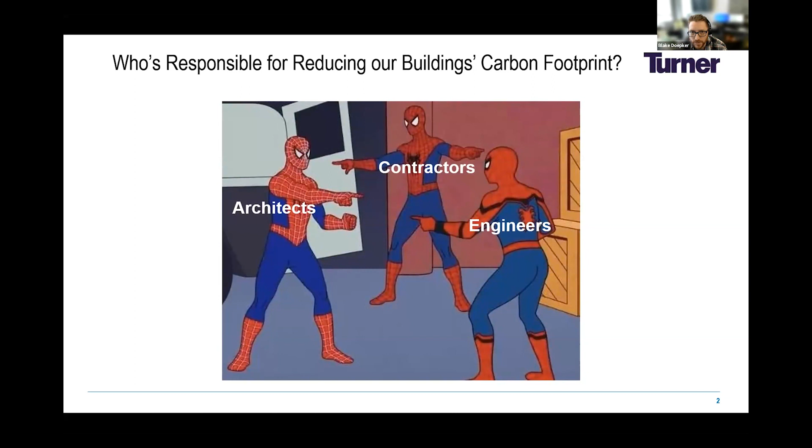The goal, when I was back in my MKA days, was to try to reduce and improve our specifications and our business as usual, and apply those lessons learned from a GC perspective. So what are we building?

I'm going to tear the Band-Aid off right now. The client likes to keep things close to their chest. I sat down with my project executive when I was proposing this conversation, and he said I'm not going to mention the project name, the client, the building type, or building location. So we're going to keep it simple.

This study involves a lot of feedback from different parties, namely our structural engineer, our architect, and most of all our sustainability consultant. I wanted to give a plug to those guys for all their hard work, at which point my PX issued the timeout symbol and said we can't even share that. So regrettably, for those I worked with, love you, but we're going to keep this super vanilla.

So vanilla it is, but we'll try and add a couple flourishes as we go.

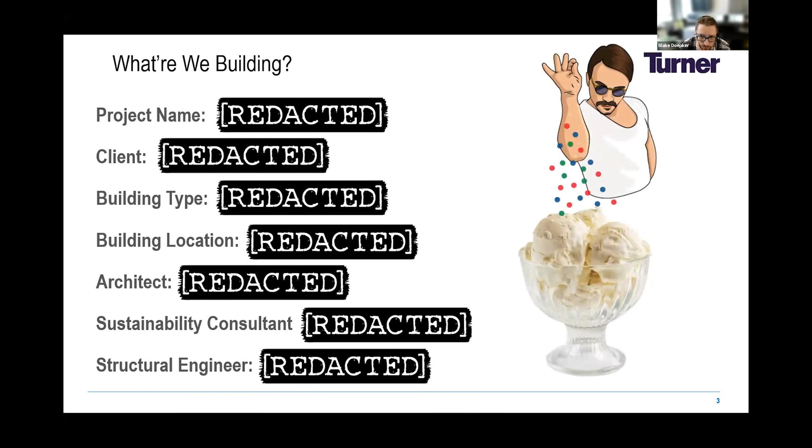Beyond the project goals coming from on high, the owner set a requirement for 10% embodied carbon reduction, with the project goal itself being to exceed that and reach a 20% reduction.

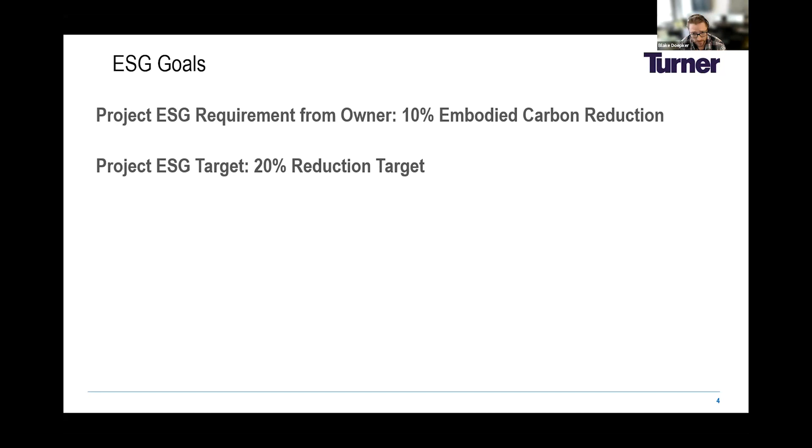For those of us in this space, we've probably talked about it at length among the design community and found passion there, but it was always running up against the will of the owners. So even if these aren't super ambitious targets, it's really exciting to see this ingrained in business as usual, and to see that becoming more pervasive in the industry.

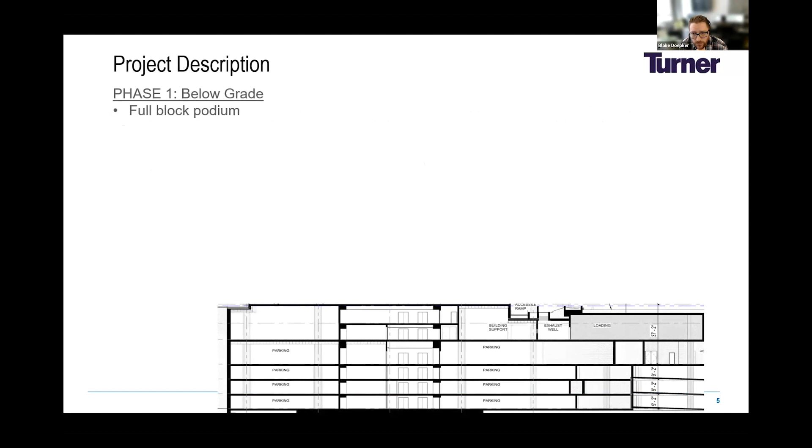The project is a full city block podium at high level and below grade. The Phase 1 tower massing was dictated by trying to maximize building height while not triggering a performance-based design approach, which would impact schedule and isn't right for this project to go too tall. To maximize floor count, we're ultimately going with the system that allows us the tightest floor-to-floor, which is a concrete system.

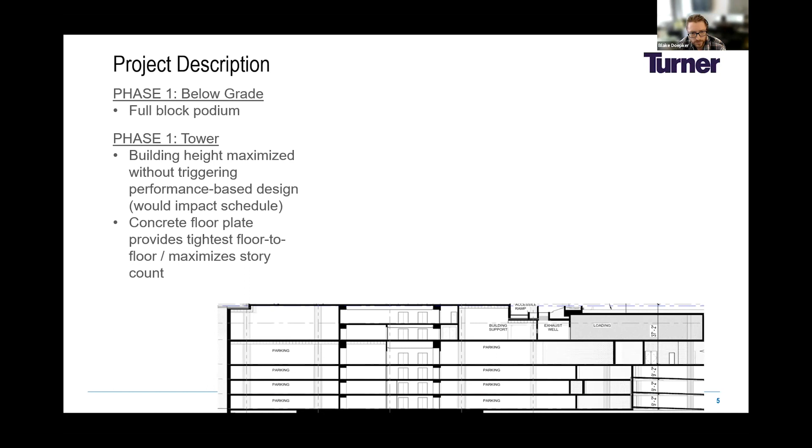Using a sample rendering, we're looking at a building tower of about 240 feet. In terms of building height and type, this made sense for our project to stay within that realm, the floor count and all that, and the system really was pretty much set.

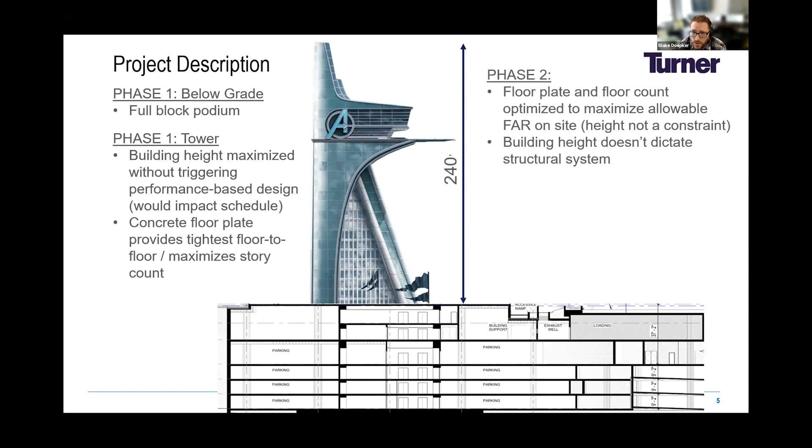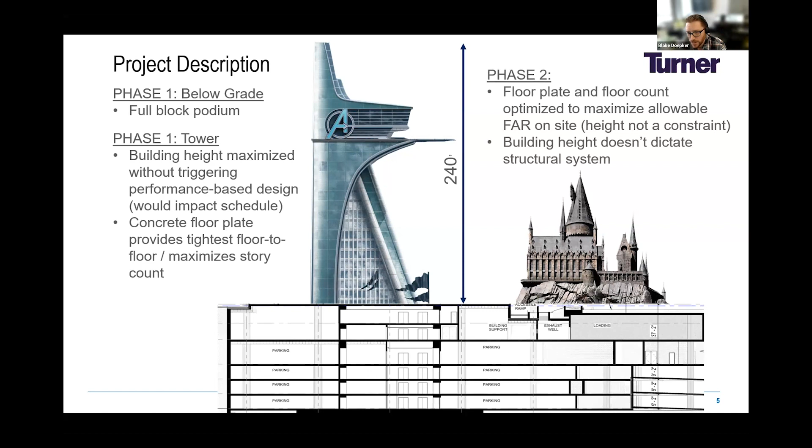Phase 2 is a different story. That building's floor plate and floor count is optimized to maximize the allowable FAR on site. In other words, height is not a constraint, so building height doesn't really dictate the structural system. Using some sample mid-rise building, we could play with the floor-to-floor, different systems, what have you, and it wouldn't really impact the functionality of the project.

Where we started as our baseline, the project was essentially a concrete PT slab, 10.5-inch PT, longer spans, more aggressive vibration criteria. That's really what's governing the design. Based on the programming, it was ideally suited for a side core type system, which for the structural engineers in the audience, means you're going to have to add some brace frames on the perimeter to manage that torsion.

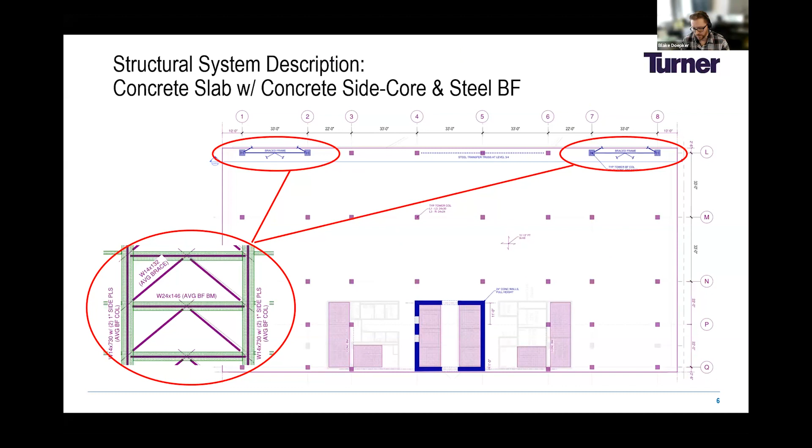Because we weren't constrained the same way on the south tower, the owner reached out and said, hey, what are we thinking about potentially—I know we were going down a path with concrete, but what about steel? So we worked with our design team to craft a couple different studies. For instance, here would be a concrete core with a steel floor framing, slab and metal deck system, and it still has those little wing walls, or brace frames, on the perimeter. And then finally we go for the all-steel option where we pull out that concrete core and instead add additional brace frames there at the center.

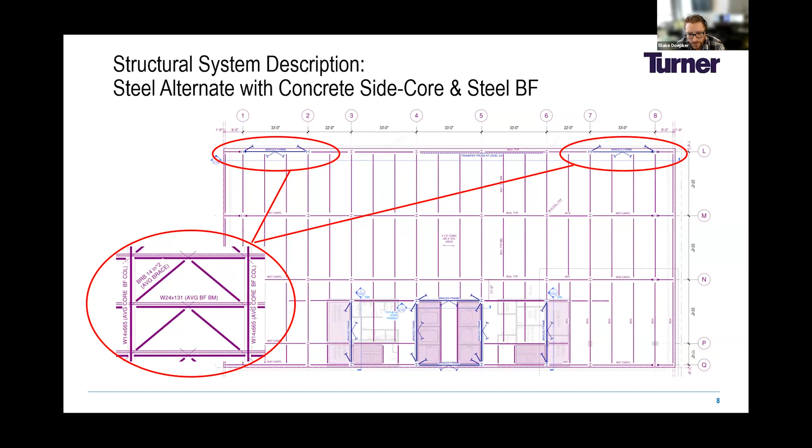One thing of note for these different systems—I already alluded to it earlier—we're looking at different floor to floors. A 14-foot floor to floor for our concrete option, but that's going to have to get pushed to roughly 15'-9" for a potential steel option. So from a facade area standpoint, those things need to be accounted for.

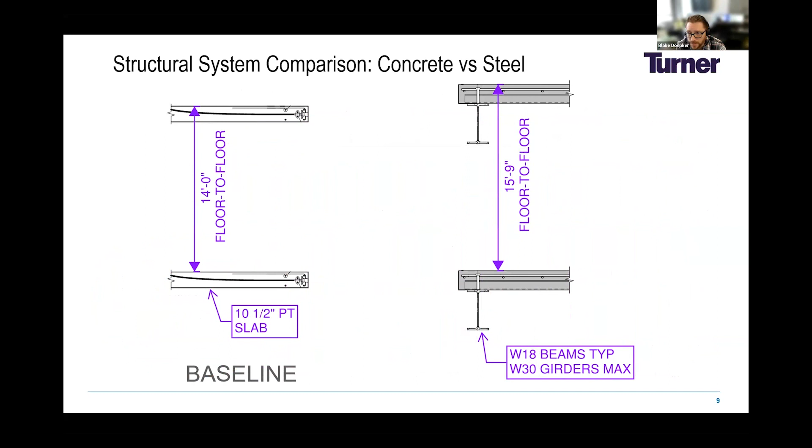Typically as general contractors, we're collectively very good at putting dollars to comparative studies. And I say collectively because I personally am not that great at it, but the estimators I work with are very skilled in this arena.

For certain clients, for certain projects, the question might be, okay, what's the cheapest, what's the easiest, what's the fastest? But to our clients' credit, they really wanted to look at this holistically and think about the big picture, beyond just dollars and cents.

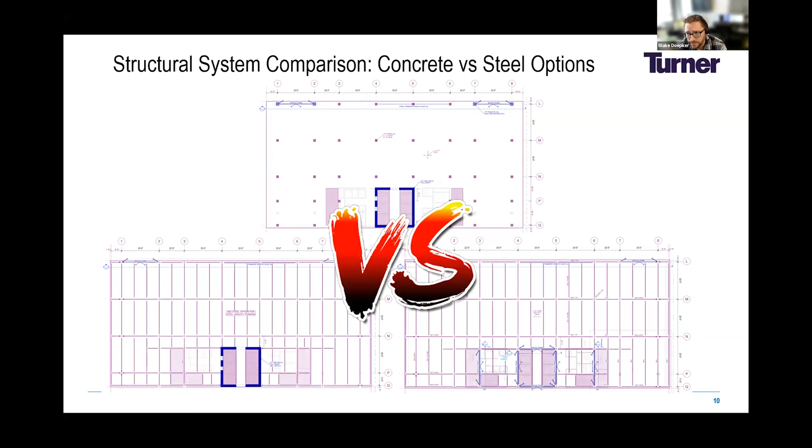Our structural engineer on the project actually proposed utilizing a decision matrix of some sort, and this provided us a good framework to work through. Giving a snapshot here, the spoiler alert was that our concrete option came out cheaper, with the all-steel option coming out with the largest premium. The premium was considerable, but not so much that we absolutely had to go with the cheapest option. We essentially assessed a whole host of different criteria.

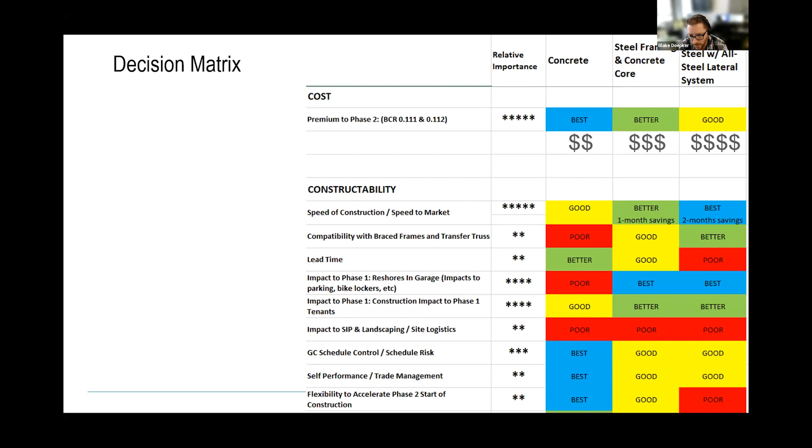So speed of construction, compatibility with our brace frames and things like that—concrete and steel don't always play nice together. And then just the impacts, if for phase 2, to what the phase 1 tenant might experience. So you can kind of see it's very subjective, coming up with the relative importance and trying to find some way to create a story. We solicited feedback from our architects, MEP trade partners, etc.

So just comparing and contrasting: a concrete building, not surprisingly, is going to be your heaviest building. It's the largest core wall, largest columns, foundations are the heaviest. However, it does have the smallest floor to floor, and the least facade area goes along with that. Steel framing with the BRB core then would be the lightest—the least amount of concrete, and the smallest foundations as well. Certainly, it does have a tall floor to floor.

The other option there, with a concrete core but steel framing, was kind of right there in the middle. So we took this opportunity to add one more line to that decision matrix, namely looking at the embodied carbon. In this case, what we did is utilize anticipated mixes. We worked with our self-perform team to say, hey, what's our typical PT mix that we've got—looking at, we're still in early phase design, so we don't know who we're going with, but looking at the past handful of jobs, what's the standard Stoneway, Cadman, and Cal Portland mix, and that's trying to inform ourselves there from our life cycle assessment.

So that was essentially not quite a guarantee of which mix we're using. Mind you, these aren't like a high-performing mix—they're just your standard run of the mill.

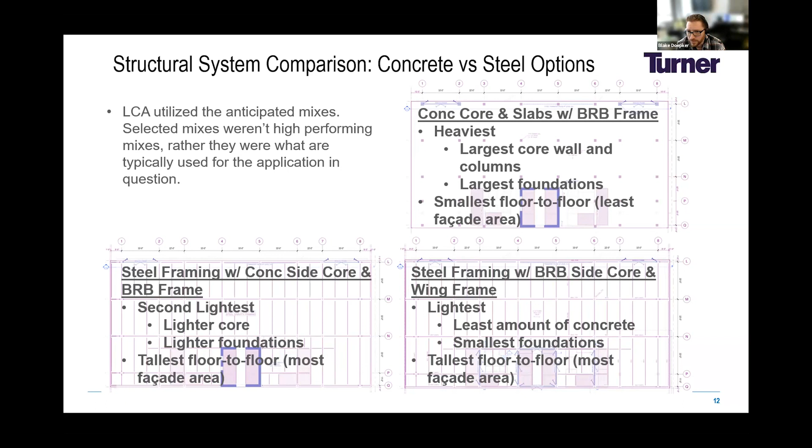And then for steel, we ultimately went with industry average values, just by virtue of the fact that there's a lot more question about where you'd source it, but there's certainly opportunity for scrutiny there.

So when it all came down to it, our life cycle assessment actually yielded some interesting results. We actually found the concrete building performed better than the steel option. Note that there's some interesting questions about that.

I did mention before that vibration criteria is a large driver in the design of our floor system. What we determined while looking at this is really for a 10.5-inch PT slab, that's appropriate for the slab spans for this particular project. And when it comes to vibration criteria, you're really getting that improvement for free. It's essentially coming along for the ride.

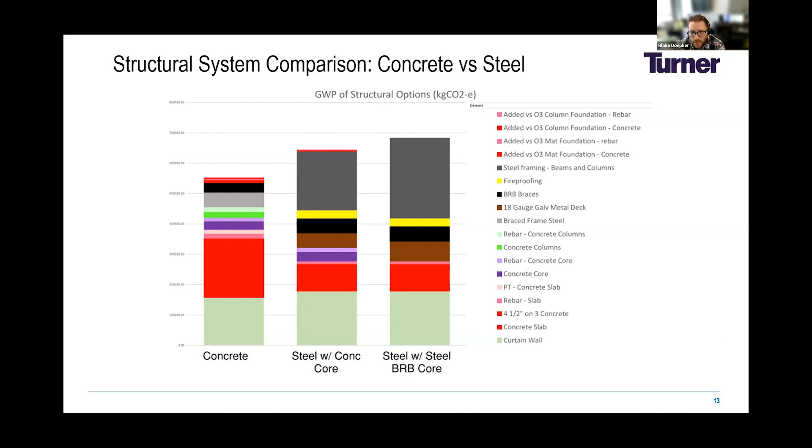Meanwhile, for the steel options, those are probably heavier than typical floor framings. So what we end up seeing is maybe a larger than typical impact due to the steel framing for our particular project.

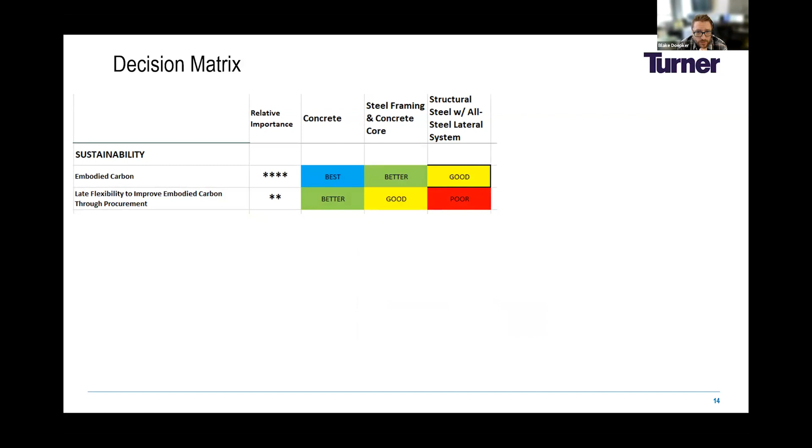So adding a couple of different lines to the decision matrix, noting the embodied carbon, I think I'll just note that this relative importance is really, again, a subjective topic. I think if you could poll the people in this audience, we might weigh those a little bit differently. But that said, it provided us a pretty important data point.

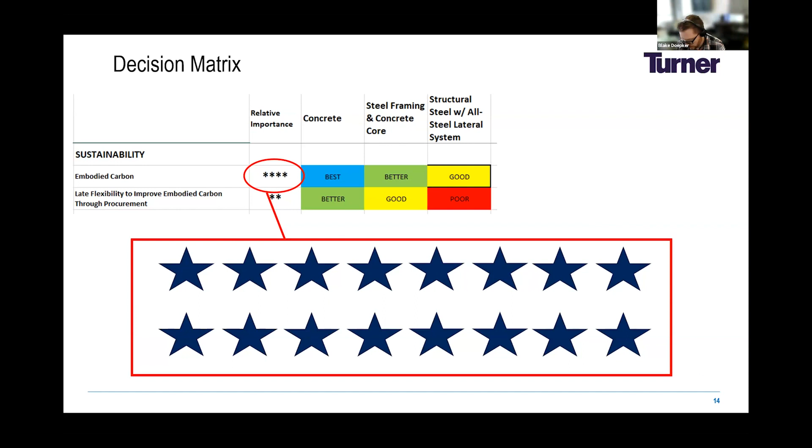And we laid this out, our design team, GC team, and ownership. We said, listen, concrete here ultimately is the cheapest. Yes, there's a schedule sacrifice. There's some pros and cons along the way, but the third thing out of our team's mouth was, this is also a winning story as far as embodied carbon goes. So it made the decision ultimately all the more simple. It was just an interesting exercise to work through.

Beyond that, this project right now, again, we are very early phase. What other low embodied carbon strategies are we considering? We're looking at, obviously, a lot of these are nothing too exotic. The specifiers in the room will certainly nod their heads at these, allowing for late strength gain.

For those who don't know, one of the first things I do when I open a drawing set is look at the general notes for the structural drawings and see what we're looking at for our mix designs. And if you're seeing a foundation mix design that's at 28 days, it's probably worth raising your hand. So that's kind of concrete 101 right there.

We're going to utilize higher strength rebar and structural steel where allowed by code. Also kind of a no-brainer because typically that's going to be a cost savings to the project, but also worth asking your SE, are you using grade 80 bar? Are we using max high strength steel for our columns?

Specifications will allow for the utilization of Portland limestone cement. Now, mind you, that's pretty much increasingly baseline in the Seattle market, but still, we're starting to see improvements in our concrete mixes just by virtue of that.

One I'm looking forward to digging into further with our curtain wall consultant is just looking at a lower embodied carbon aluminum for our mullions. That one, I know there's going to be a premium associated with that. I'm looking forward to digging into it, seeing what we can save and laying that story out to the owner.